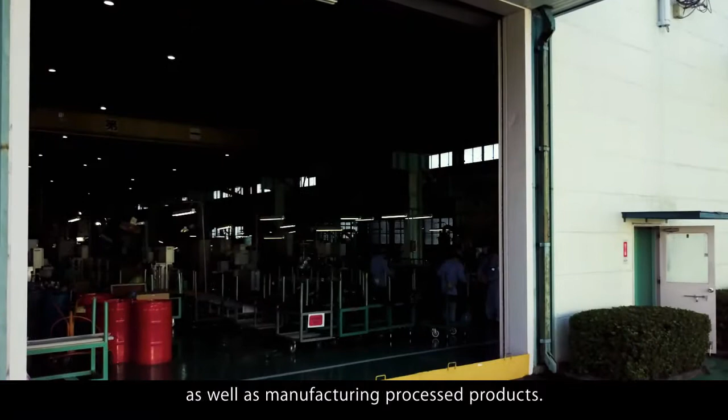Nippon Kinzoku is further advancing plastic working technology that we have been developing since our foundation, as well as manufacturing processed products. Among these products, fine pipes are manufactured here in the Nippon Kinzoku Gifu plant.

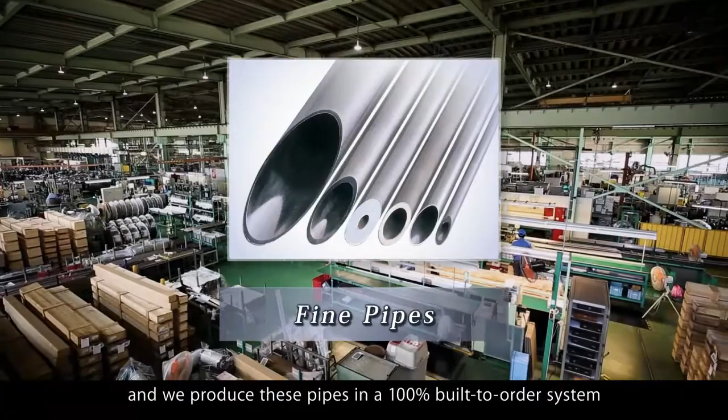Fine pipes are also called welded drawn tubes, and we produce these pipes in a 100% built-to-order system to meet customers' demand for high-quality and low-cost products.

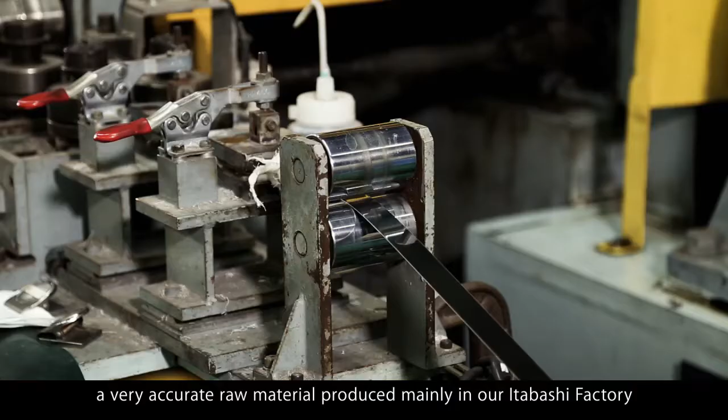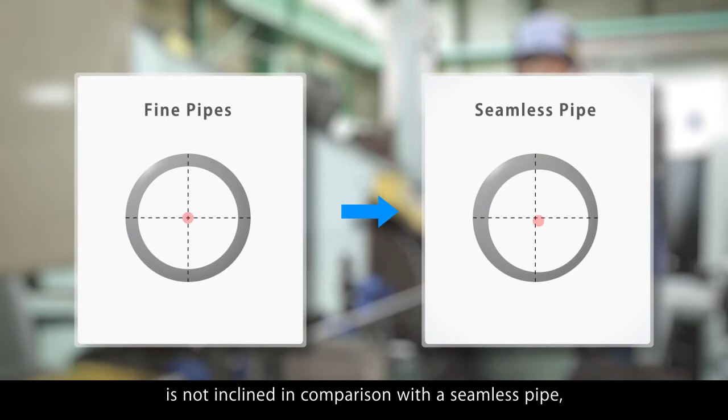In the manufacturing process of fine pipes, a very accurate raw material produced mainly in our Itabashi factory is formed into the shape of a pipe by roll forming, so the high-precision pipe center is not inclined in comparison with a seamless pipe, and its wall thickness is extremely even.

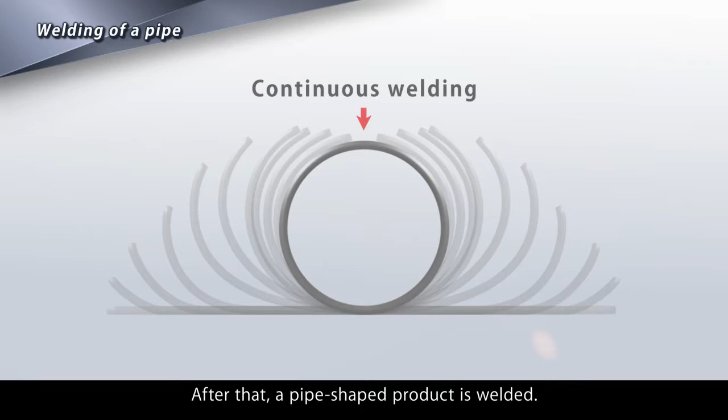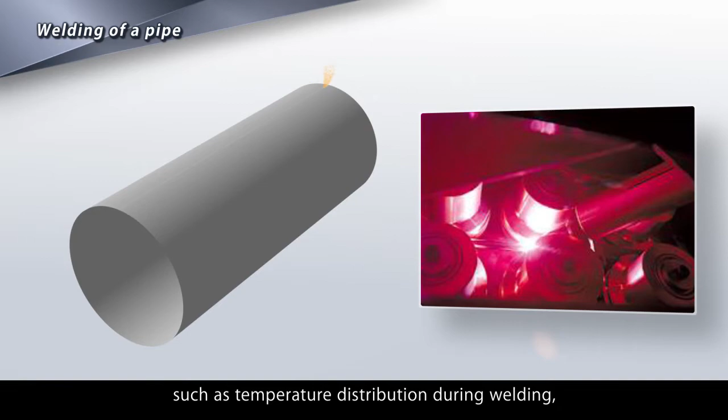After that, a pipe-shaped product is welded. Its weld strength is ensured by thoroughly monitoring the condition of the weld, such as temperature distribution during welding. So a fine pipe with a weld has been demonstrated to have sufficient strength and to be as reliable as, or even more reliable than, a seamless pipe.

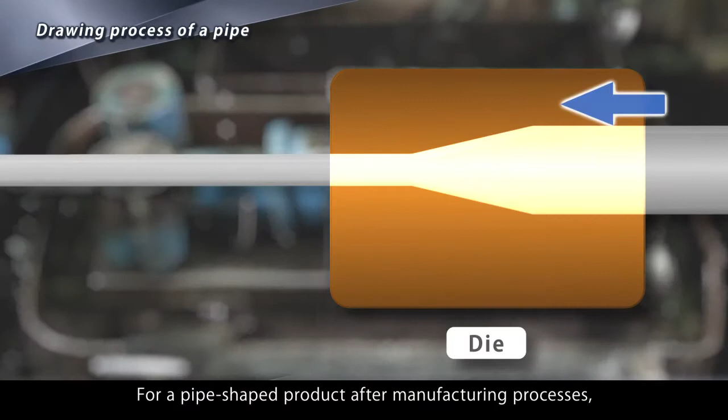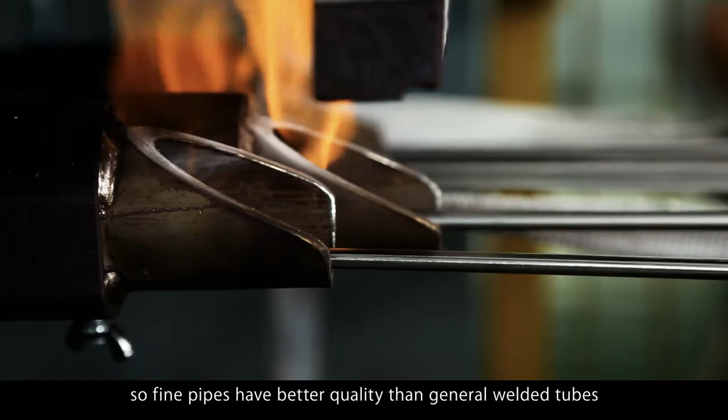For a pipe-shaped product, after manufacturing processes, the quality of its inner surface and the metal structure of a weld is controlled by combining drawing and annealing processes. So fine pipes have better quality than general welded tubes in terms of dimension accuracy and strength.

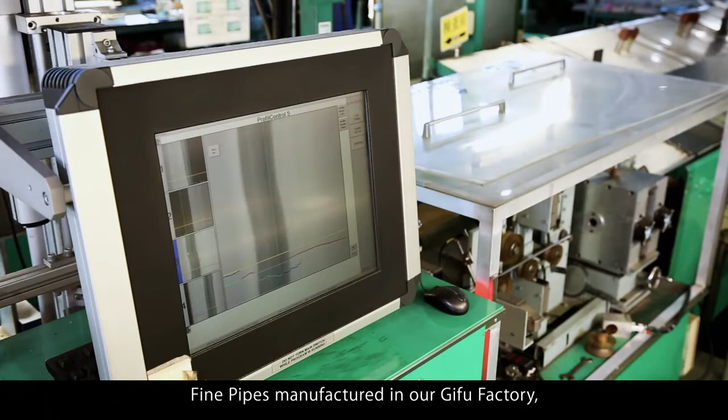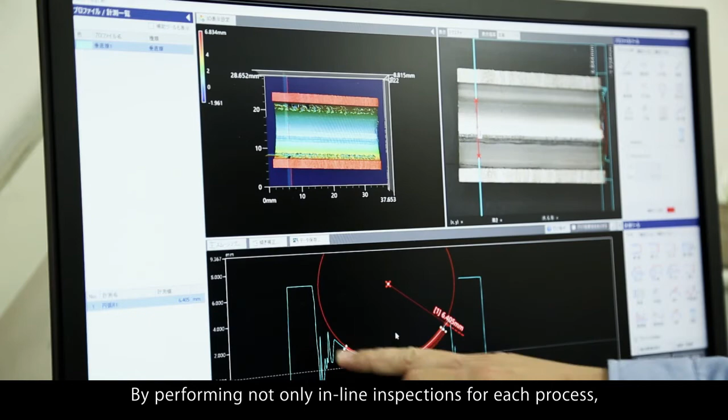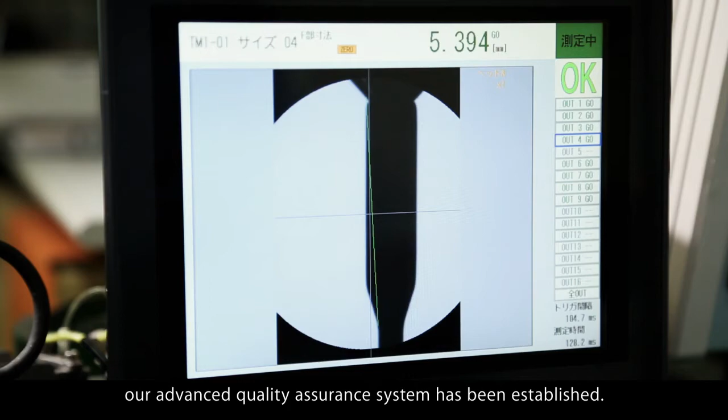In addition to quality, fine pipes can be delivered in various forms. For customers, these forms can contribute to a reduction in working costs and improvement in productivity.

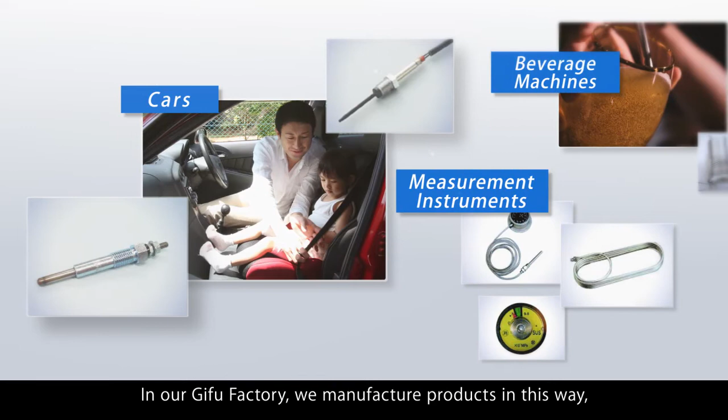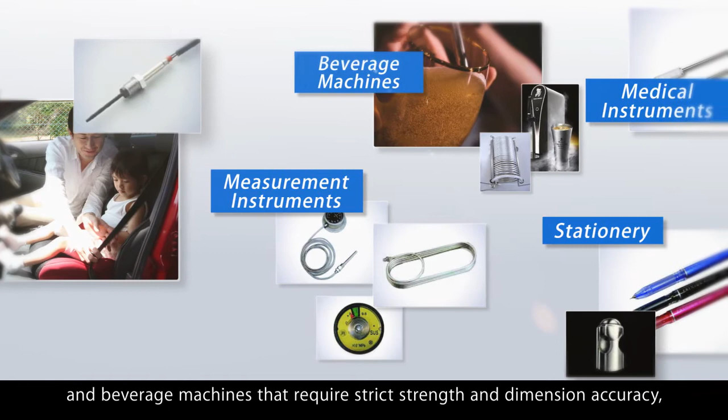In our Gifu factory, we manufacture products in this way, and these products are applied to car parts, measurement instruments, industrial devices, and beverage machines that require strict strength and dimension accuracy, as well as stationery and medical instruments that require precision. Thus, we contribute to the development of the whole of society.

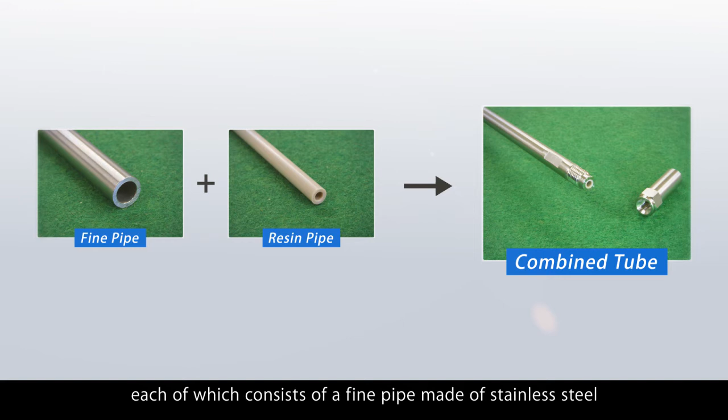In addition, as a challenge for developing new products, we have succeeded in developing combined tubes, each of which consists of a fine pipe made of stainless steel and a pipe made of a resin material. These tubes are being adopted for chemical analysis instruments, and their use is expanding.

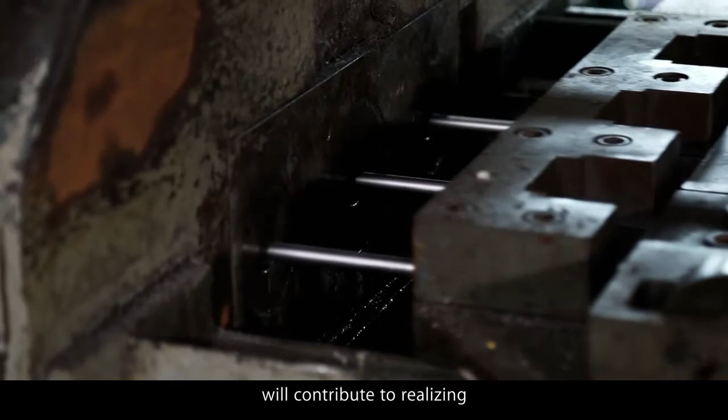Fine pipes, which have excellent dimension accuracy, strength, and extremely high surface quality, will contribute to realizing the ideal products for our customers going forward.